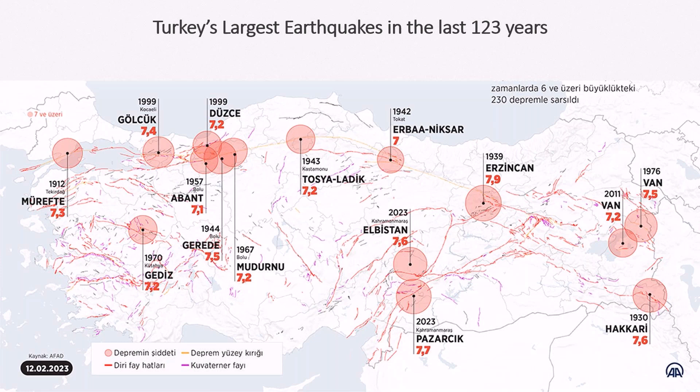The first earthquake had a moment magnitude of 7.7, with the hypocenter at a depth of 8.6 kilometers. Ten minutes later, another 6.6 earthquake happened—this was the first incident that caused the majority of devastation and collapses. Only after 9 hours, another 7.6 earthquake occurred in the northern part of Kahramanmaraş, in Elbistan, at a depth of 7 kilometers.

As of March 20, the death toll is 50,000 people, with 100,000 people injured. We experienced 17,000 aftershocks—minor, with maximum magnitude up to 6.7. 11 cities are affected, 20,000 buildings collapsed, and 10,000 search and rescue team members from 88 countries were deployed and sent to Turkey.

I want to talk about the regional tectonics a little bit. I'm sure you're all aware of this if you've done your research. The Anatolian microplate is moving west under the effects of the African, Arabian, and Eurasian plates. This movement exhibits itself in the form of two major strike-slip faults: the North Anatolian Fault and the East Anatolian Fault. These recent earthquakes happened near the Marash Triple Junction, where the Arabian, African, and Anatolian plates meet, and this junction is quite an active zone.

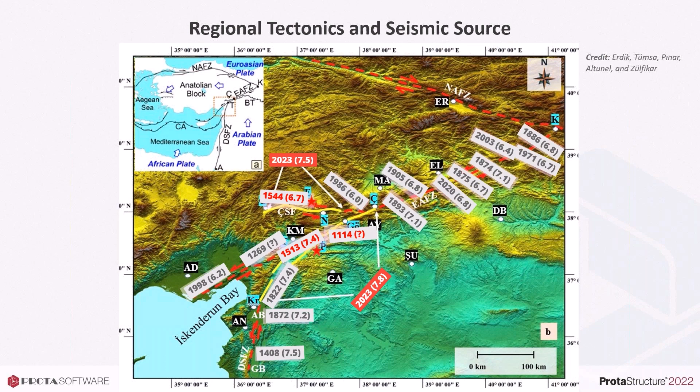Here you see the map of the East Anatolian Fault Zone. The major active fault segments are shown in dashed red lines, and the yellow dashed lines show reactivated segments during the February 6 events. The numbers in the rectangles show the year of the last major historical earthquake in that fault segment and its approximate magnitude. Based on historical data, the fault segments ruptured during this earthquake sequence were seismic gaps with tectonic stress accumulated for at least 500 years. I tried to show them in red fonts.

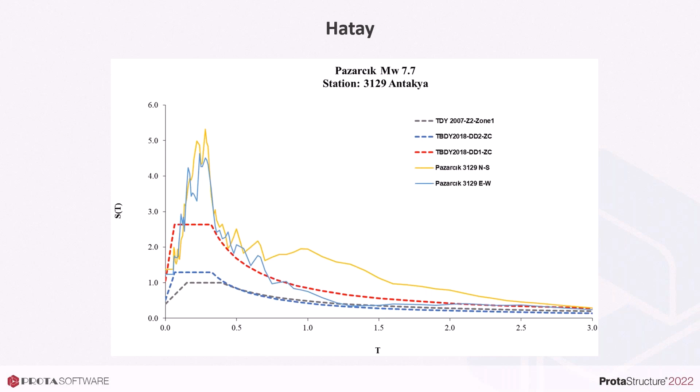The city mostly has 5 to 15-story residential buildings, which seem to be the most affected as seen in the spectral acceleration spectra. The spectral accelerations exceeded the design basis earthquake (DBE) in the code, but they seem to be below the maximum considered earthquake (MCE), which has a return period of 2,500 years, especially before 0.5 second periods.

The basin amplification effect is clearly seen after approximately 1 second, and even after 0.5 seconds for some stations. Since most of the buildings in Hatay have 5 to 15 stories, that means the majority of the buildings are affected.

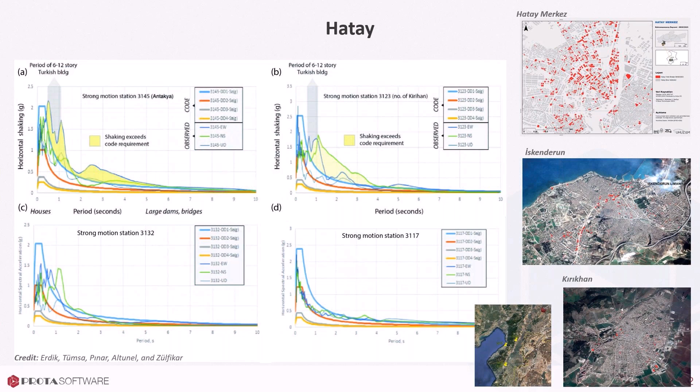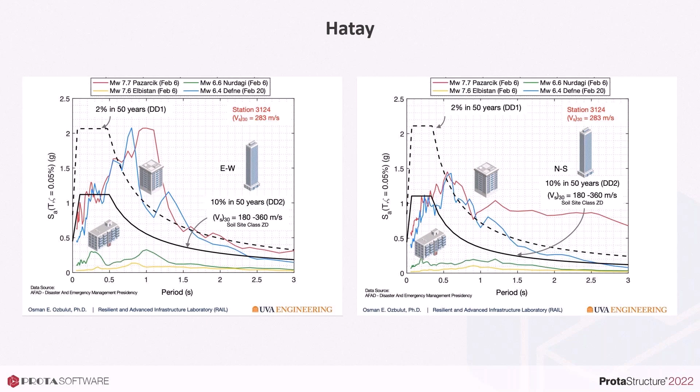It exhibits 5 to 6 times greater spectral accelerations than the code spectra between 0.1 and 0.5 seconds. This record is not currently on the government AFAD website; probably there is an error with the data and it will be restored once corrected. But this means that 2 to 6 story buildings near the station will be damaged.

For confirmation, the spectral accelerations in the Kahramanmaraş city center, stations 4620 and 4615, are also plotted. Acceleration values seem to fit with DBE and MCE code spectra, but still an amplification is observed after 0.5 seconds for station 4615.

This means buildings designed and constructed in accordance with the new Turkish earthquake code should perform well. Old or deficient buildings may suffer from spectral accelerations as high as 1.25 G.

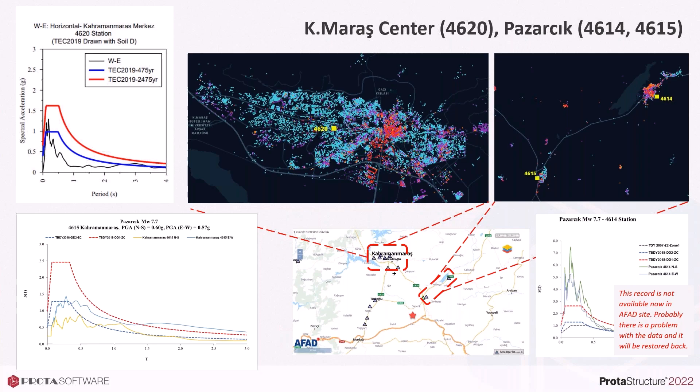A similar scenario is observed for Gaziantep. In the city center, the code spectra seem to estimate the spectral acceleration demand well, and the new buildings should not be suffering from collapse.

By new, I mean buildings designed and constructed maybe after 2007 and 2018, even after 2000, if they are supervised and constructed well.

But on the graph, we see spectral accelerations as high as 0.6 G for very old and deficient buildings, for 2 to 5 story buildings, in Gaziantep Merkez city center.

In Islahiye, one of the provinces of Gaziantep, 2 to 5 story buildings suffered from approximately 2G spectral acceleration. In Nurdağ, another province, amplification is also observed and high spectral accelerations are seen on the graph. The code values were exceeded, but MCE values still seem to estimate it well. The mostly affected buildings seem to have 2 to 12 story heights.

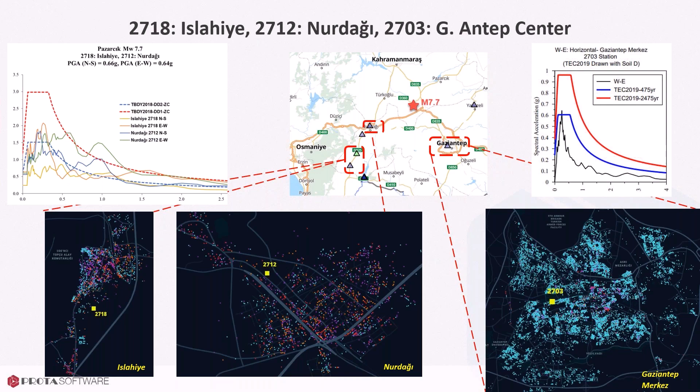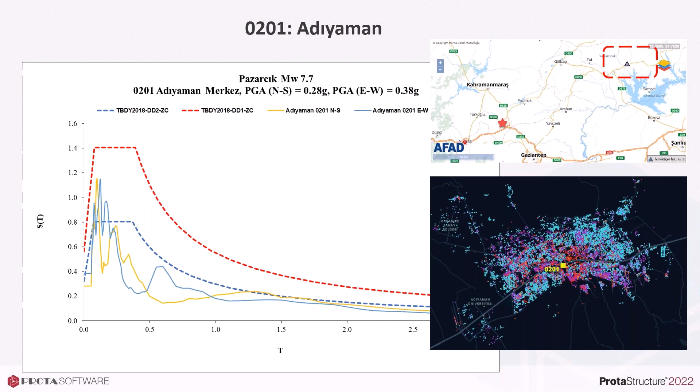For Adıyaman city center, buildings with 0.1 to 0.3 second periods seem to suffer a maximum of 1.2 G spectral accelerations. After 0.3 seconds, a quick drop is observed. Buildings complying with the relatively modern Turkish earthquake codes should perform well in this scenario, but older and deficient buildings will be adversely affected.

Osmaniye is another city that did not experience spectral accelerations higher than the code specified values. So 5 to 15 story deficient or old buildings will be affected from soil amplification. If you check the period values between 0.5 and 1.5 seconds, you can imply that 5 to 15-story buildings, roughly between 0.7 and 1.5 seconds, will be affected, but the values are still under the MCE.

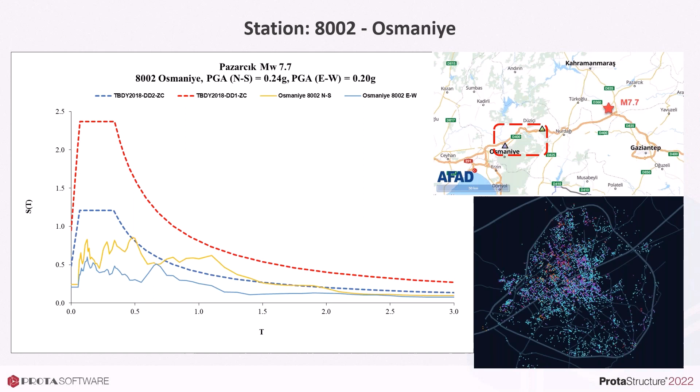As a result, we can maybe say that in some of the cities the spectral accelerations were really high, especially when we have the soil amplification effects in Hatay or other areas like Gaziantep, Nurdagi, or Islahiye. But we cannot say the same for all of the cities. The other cities seem to have relatively lower spectral acceleration values.

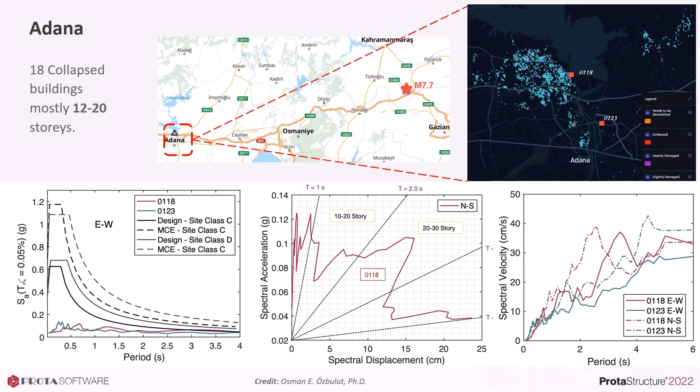So let's talk about the damages that we have seen on the site. One of the most commonly encountered failures or insufficiencies regarding material quality is the brittle failure of rebars. I'm not sure if you can notice it on the screen, but in reinforced concrete we don't really expect the reinforcement bars to fail like a brittle chalk.

These rebars are most likely untested, and they seem to be not meeting the production standards in terms of carbon content. So they are either brittly sheared or just ruptured. This is not the proper behavior that we expect from a rebar.

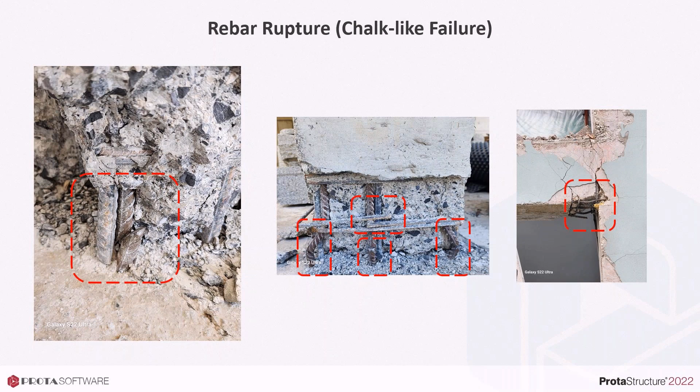Another frequent cause was insufficient lateral stiffness. The majority of the buildings that we have seen have insufficient lateral stiffness, which results in, if not collapse, a high level of damage in structural and non-structural members.

Unfortunately, it's not a common practice in Turkey to use shear walls in buildings. If used, the ratio of the shear walls to total area is usually not sufficient. So we cannot say that all of the buildings are frame buildings — we also have shear wall frame buildings in our country, but when you check the ratio of the shear walls, usually they are under a certain ratio.

And of course, the wall dimensions in mostly residential buildings are used at the minimum sizes required by the code. Also, one of the reasons for that is the architectural design, which does not allow the use of shear walls, especially at the building perimeters. And this is combined with poor construction and poor supervision.

When you build a frame structure in such a country — not only Turkey, but any country with poor supervision and construction practice — the frame systems cannot withstand earthquake forces without damage or collapse, because frame systems, as you're well aware, need to be detailed very diligently in order to sustain ductile behavior.

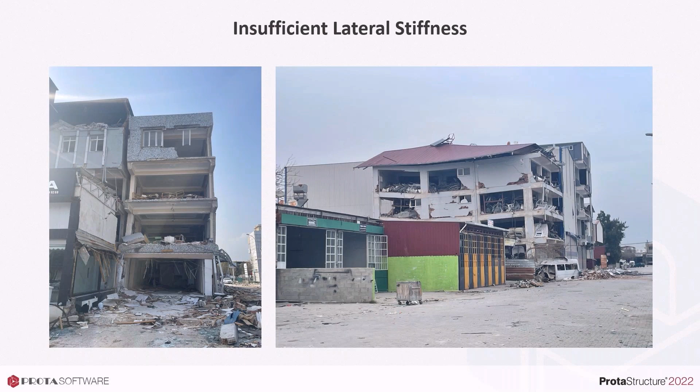So these are two examples of a bad habit in structural system formation. First, due to permit reasons, and in order to enlarge the floor plan area — the commercial area at the upper floors — heavy cantilever portions are used in the structural system.

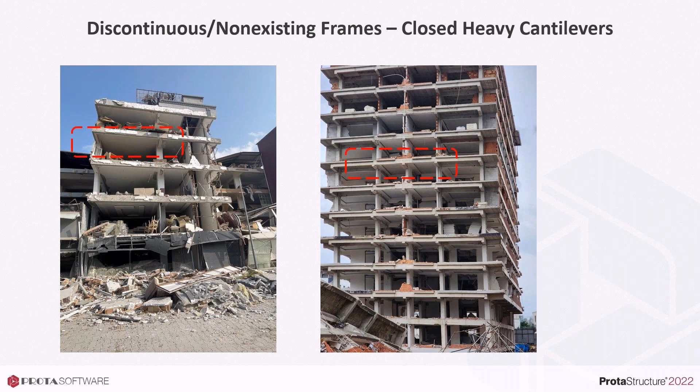And since architects prefer a flat ceiling, this results in discontinuous frames, as you can see in the pictures. Because the frames are discontinuous, the building's lateral stiffness is reduced because of that. So this is a typical floor plan that can be encountered in practice.

The only shear walls are utilized in elevator shafts, and they are asymmetrically positioned at the edge of the building. And the building floor area is enlarged at the upper floors using cantilevers, which again results in discontinuous frames. You can see the beams missing on axis A, which creates an additional lack of lateral stiffness.

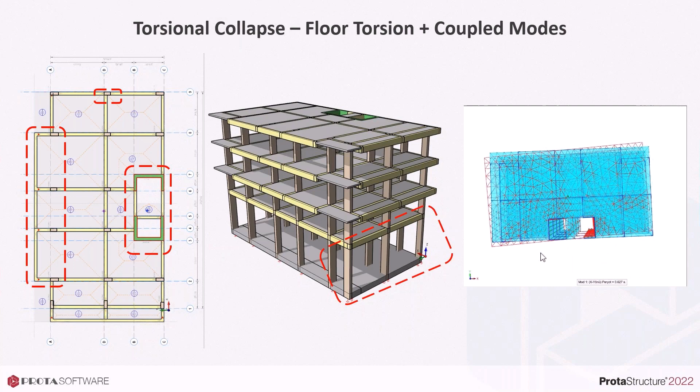So if you look at the displaced shape — the mathematical model of the building — it's clearly evident that this building has the first mode of torsion. That's the example on the side. Torsional irregularity and mode coupling is a very important factor for triggering collapse.

In this building, a rotational collapse is observed. It's also combined with a soft story, as can be seen in the ground story columns. Most probably the ground story was a commercial area with larger story height and without any masonry walls or shear walls.

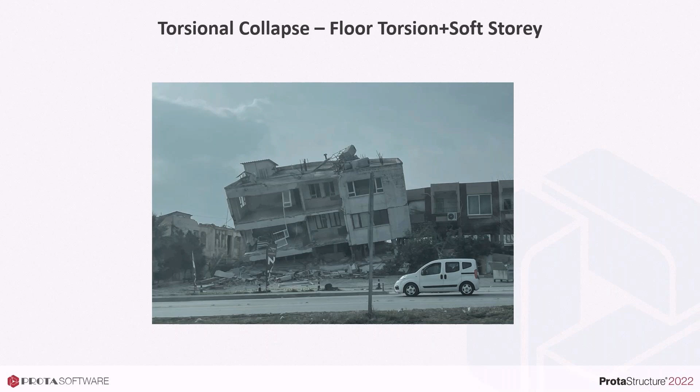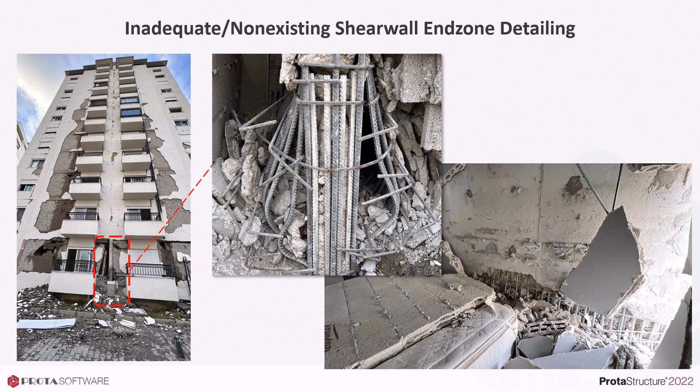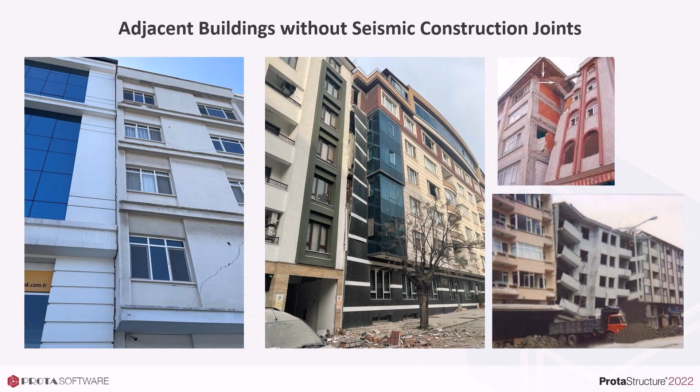Adjacent buildings are also very common practice in Turkey. Insufficient construction joints and mismatching story levels are primary causes of pounding damage.

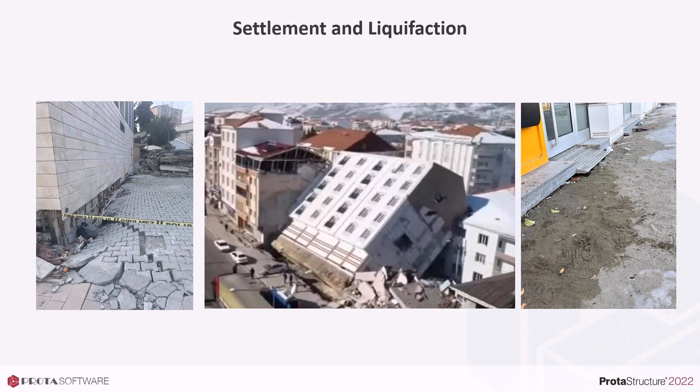We have also observed settlement and liquefaction issues. The reason is, of course, construction on cohesionless alluvial deposits with high water table, without any ground improvements such as jet grouting, etc. Incidents of sand boiling are also observed, especially in the Iskenderun region.

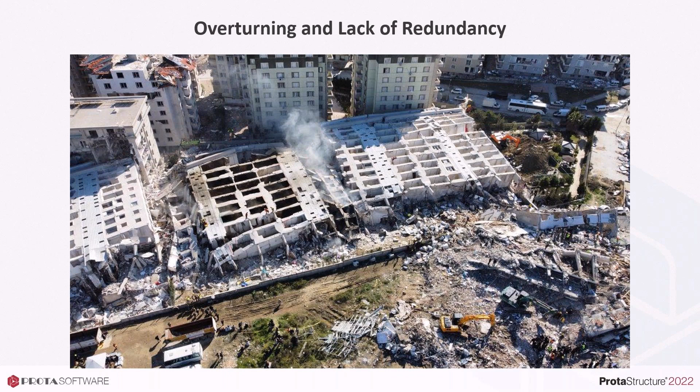Turkey has a large old building stock. Most of our buildings are older than the year 2000. It was after the 1939 Erzincan earthquake that seismic effects started to be considered in building design in Turkey. The 1975 earthquake code had provisions for seismic resistant design. In 1998, we had a relatively modern earthquake code, quite like UBC. It had capacity design principles to control failure mechanisms and brittle failures in the members and joints.

Then the 1999 Gölcük and Düzce earthquakes happened. These were also devastating events with 7.4 magnitude. In 2007, we had a new seismic code. The calculation of seismic hazard was the same as the older code, which divided the country into 4 seismic zones. But it was the first time the codes had a dedicated section for retrofit and assessment of buildings, in 2007.

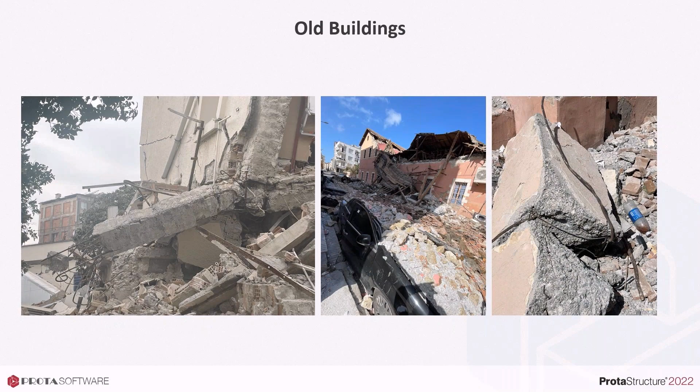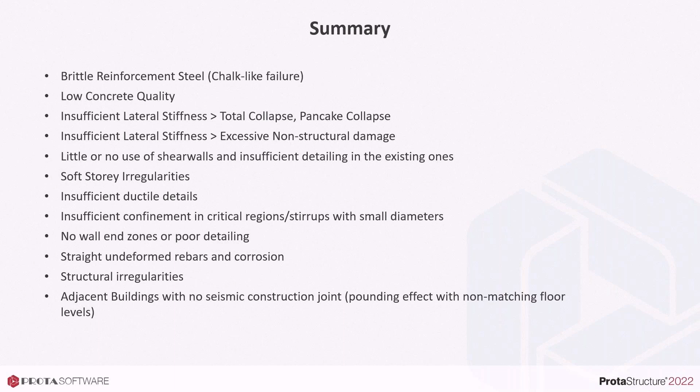But we also have standing buildings. The buildings we have seen with a sufficient amount of shear walls, or shear walls placed in proper locations, prevented collapse and reduced lateral displacement. Buildings with well-established structural systems still stood, frame buildings with substantial column sizes like 80 by 80, and they seem to have had good supervision. Retrofitted buildings, like one of the bank buildings or the block I'll tell you about, also seem to be standing.

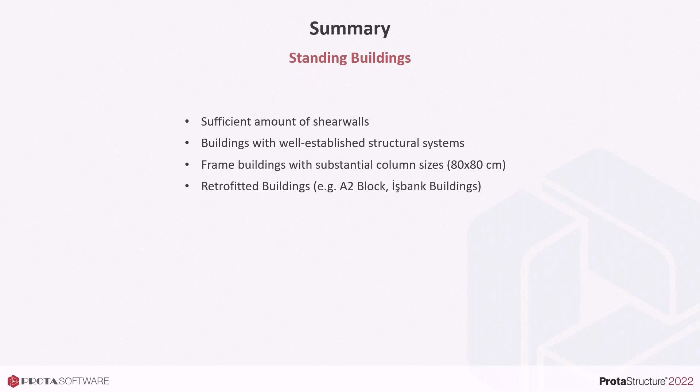So what's next? These are my personal opinions, of course. We need to have professional engineering in Turkey, and our engineers - and I think all engineers in the world - should have the knowledge and the feeling of structural system behavior. We need to have the ability to interpret and check computer outputs. Unfortunately, that's not the case in Turkey.

Because of the complexity in the codes and the methodologies in the codes, doing a hand calculation is not possible. We have to use computers, that's a fact, but we have to understand the methodology and be able to check it. The more complicated the code methodologies get, the more difficult it gets to check the building or understand what's going on. Maybe in Turkey we should switch to a Chile model with compulsory shear wall usage.

And for the existing building stock, we need effective and easy to apply retrofit techniques with safe and relatively easy assessment methods. So these were my two cents about the earthquake in Turkey. Of course, specialists should comment on it better and further, and obviously further studies should be conducted on this earthquake, because these were maybe the biggest earthquakes in the history of Turkey.

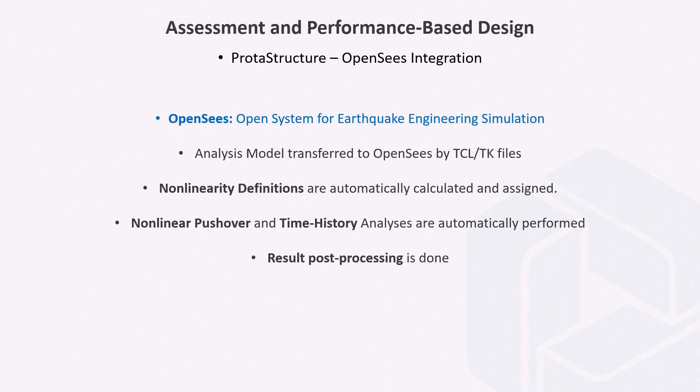ProtaStructure's analytical model is communicated to OpenSees via TCL files. In addition to the detailed analytical model, nonlinear material properties are automatically calculated and added on top of this geometrical model. The entire structure is then ready for performance analysis. For a successful OpenSees integration, considerable pre-processing and post-processing is necessary - all the material nonlinearities have to be generated and sent to OpenSees.

Column, beam, and wall sections can be modeled with fiber elements and analyzed with numerical techniques to derive moment curvature relationships in ProtaStructure - that's what we do. We are using confined and unconfined concrete regions, and strain hardening in steel can be taken into consideration. For more accurate analysis, you can even create the fiber mesh around the rebars.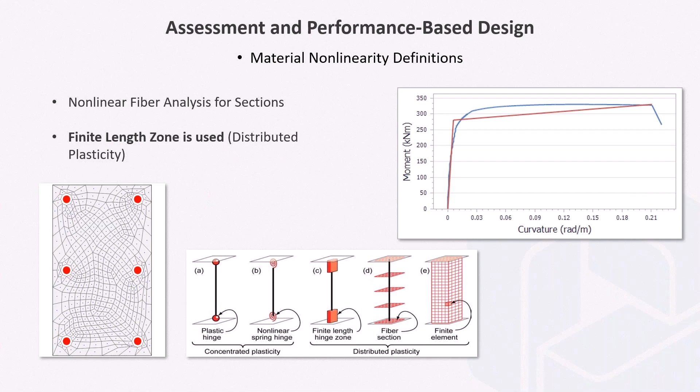The single mode static pushover analysis is performed again using ProtaStructure OpenSees integration with the plasticity models I have described. Parameters such as number of steps and target displacements can be controlled by the user. After the analysis, we obtain the capacity curve, which describes the capacity of the building, as the name implies, and is independent of the earthquake demand.

So what we do is allow you to select a node that you want to monitor. You can monitor any node on the system and create the capacity curve for that node, and so we can extract the results at a certain demand point.

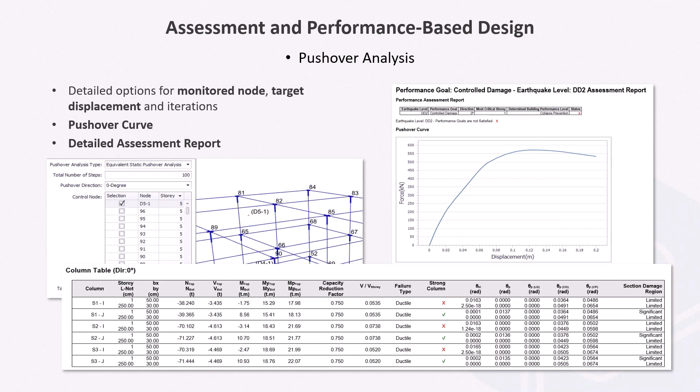After finding the demands, we create a performance assessment report. A vital step after obtaining the capacity curve is to find the demand that a target code spectrum requires, also known as the performance point. The target displacement identifies the performance point. After plotting the capacity curve, ProtaStructure can detect the target displacements according to FEMA 356, Eurocodes, and Turkish codes.

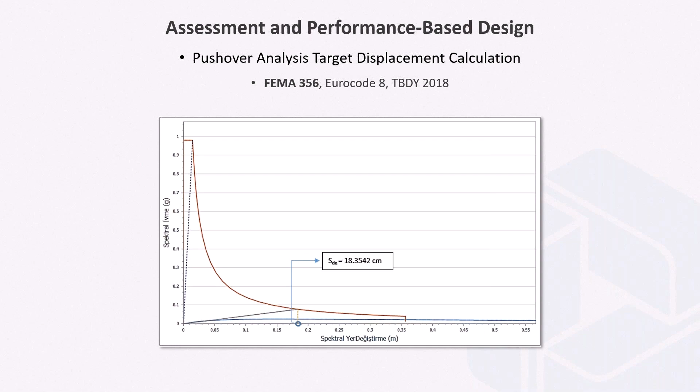Then we extract the values from that demand step and create an assessment report with the axial loads, shear forces, moments, and plastic rotations obtained at that certain point.

A nonlinear time history analysis is different. The pushover analysis in ProtaStructure is a single mode static pushover analysis, meaning as the load pattern we use the mode shape, the first dominant mode shape, as a load pattern. Of course, pushover analysis is a nonlinear analysis, and it can consider the hinge mechanism and redistribution between members, but since it depends on the first mode, it's not valid for all buildings.

Particularly if you have higher buildings, or buildings with coupled modes, or mass contributions less than 70%, or torsional irregularities, even static pushover may not be applicable for the building. In that case, you have to revert to a nonlinear time history analysis, which is also possible in ProtaStructure with OpenSees integration.

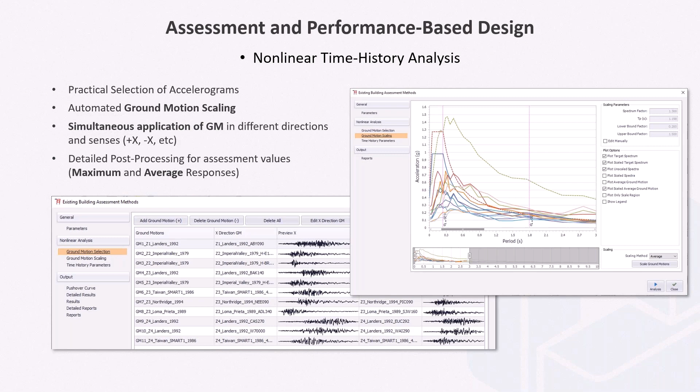After that, we post-process the results for maximum and average responses. Remember that we cannot use only one set of ground motions; we have to use maybe 11 ground motions. So extracting maximum negative and maximum positive responses from these data sets for each time step, and preparing and harvesting them for a proper assessment report, is quite time consuming. ProtaStructure can do it for you.

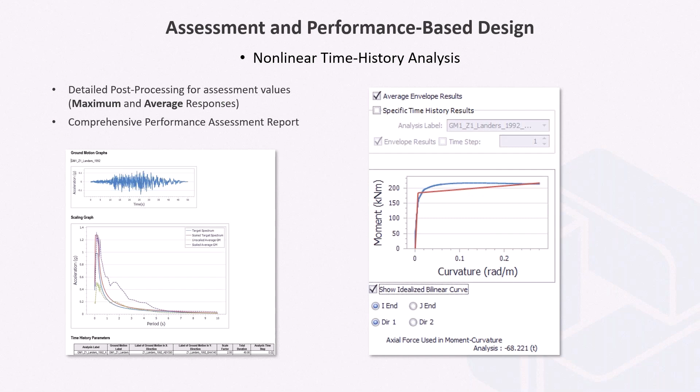Here you see some of the examples, some of the screens that you can see in ProtaStructure. Also, at the end of the building assessment, to visualize the assessment results, you can color code the member damage regions in the 3D model.

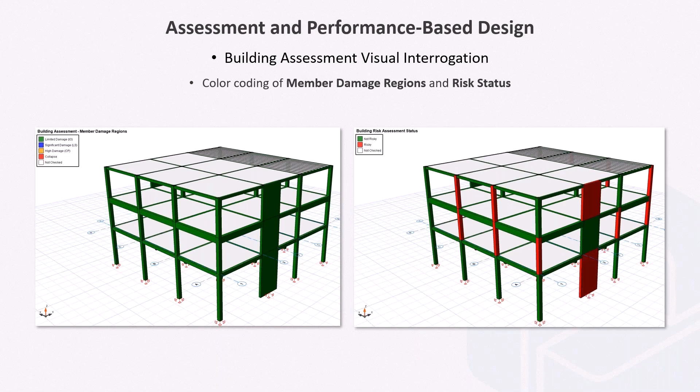To mention a little bit about retrofit techniques: first of all, retrofitting existing buildings may not be feasible for all buildings. If the cost of the retrofit exceeds 35–40% of demolition and rebuilding the structure, it will lose feasibility. But if the building is very valuable and you cannot just give up on it, retrofit can be a viable solution.

One of the most utilized retrofitting strategies is to use reinforced concrete walls inside the existing frames, or you can just use eccentric shear walls attached to the exterior of the building, as I will explain in my case study.

This method improves the overall lateral behavior of the existing building, but you have to apply it from the foundation to the top of the building. This is called a system retrofit. It doesn't focus on individual members; rather, you focus on improving the condition of the building, especially the lateral stiffness.

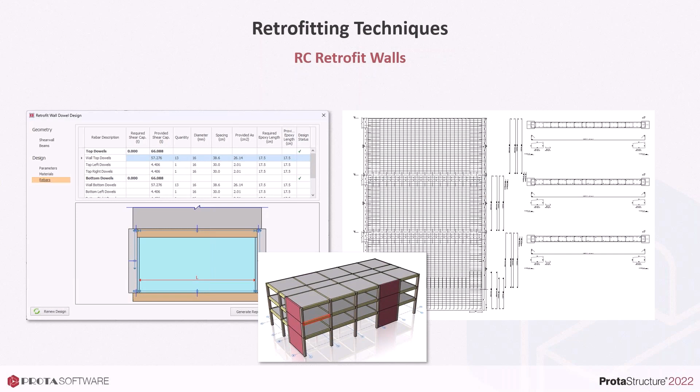Another common approach is to apply reinforced concrete column jackets, but jacketing can be considered a member retrofit rather than a system improvement—it focuses on individual members. So the first reflex of the engineer should be to improve the lateral system rather than focusing on individual members. An RC column jacket can improve the axial load and moment capacity of the existing column, but you can only improve the moment capacity if you extend the longitudinal bars into the upper story.

That means you have to drill the slab and extend the bars to the upper story. This is an option in ProtaStructure as well. If the existing column is too damaged or weak, you can also delete the existing column from the model, so you don't get any results from it in the assessment report. That may usually be the case because when you insert a jacket, you also apply dowels to the existing column, so the jacket and the existing column start behaving in the same way—they become integrated together. So maybe it should be considered that way.

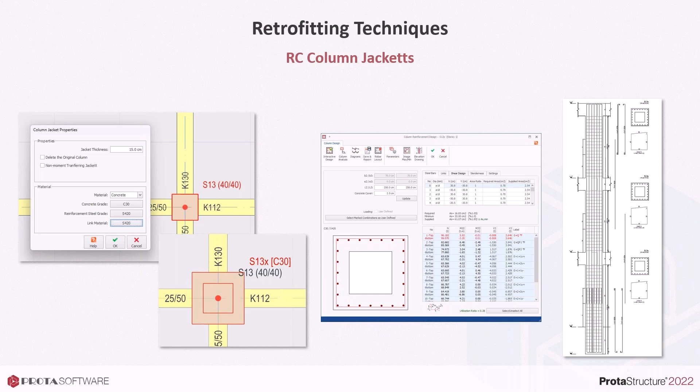Another popular retrofitting technique is wrapping the columns and beams with CFRPs. But it's again similar to jacketing—it's a member retrofit rather than a system retrofit. In ProtaStructure, you can insert this retrofitting scheme to the members. For columns, it increases the shear capacity and axial capacity because it provides additional confinement to the column, and for beams, it increases the shear capacity. ProtaStructure allows you to consider these effects.

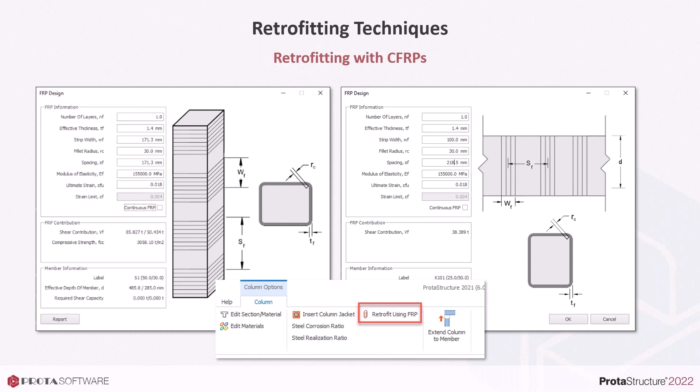Another retrofitting technique that can be considered is base isolation, but we usually don't use it as a means of retrofit in most buildings, because if the building is too weak or the lateral system is too deficient, it may not be feasible or practical to install these isolators. So to use base isolation, the building should have a high economical value—it should be approached with caution. But you can use base isolation as a retrofit technique.

In fact, we applied this to one of the hospital complexes in Istanbul using ProtaStructure. All the existing columns were cut and isolators were installed. This was a relatively robust building, built in 1999. And the building to the right, the curved one shaped like a boomerang, is a new building that's built with isolators.

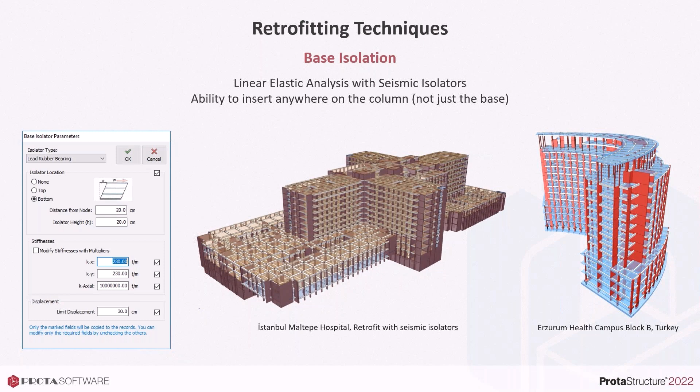This is an example section from the seismically isolated hospital. The yellow ones you see are the isolator units applied at the top of the columns in the basement, and the red ones are just like sliders, roller supports, which have very little lateral stiffness.

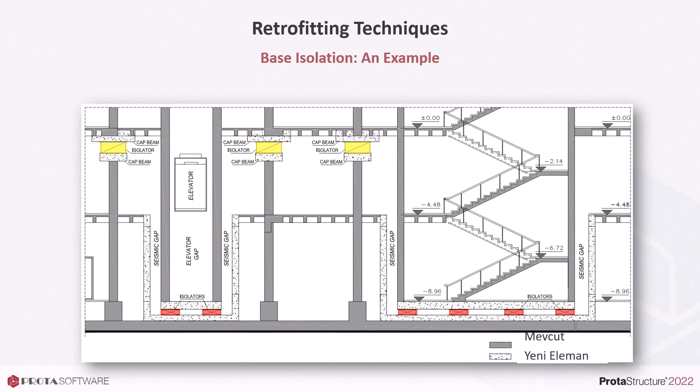As I've said, you can model seismic isolators in ProtaStructure—this is a screen capture from a ProtaStructure analysis model. But I want to emphasize that you have to decide the isolator type and isolator layout before modeling them in ProtaStructure, since ProtaStructure cannot perform a nonlinear analysis with the isolators. After selecting the isolator types and introducing their equivalent stiffness values in the model, you can perform a linear elastic analysis in ProtaStructure.

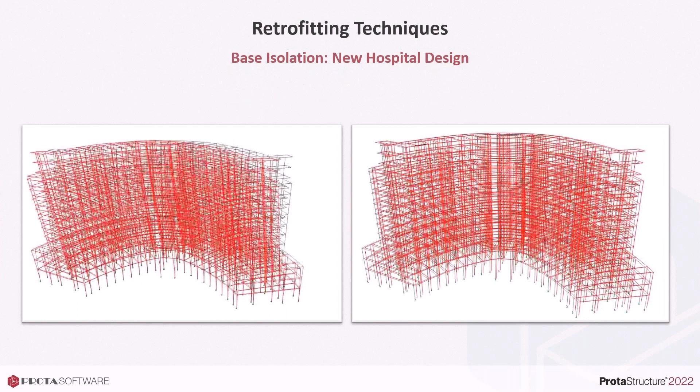So these were all the things I wanted to say about retrofit techniques and assessment techniques. Of course, this is a very detailed topic, so I can only give you an overview of ProtaStructure's capabilities and an overview of the analysis methods themselves.

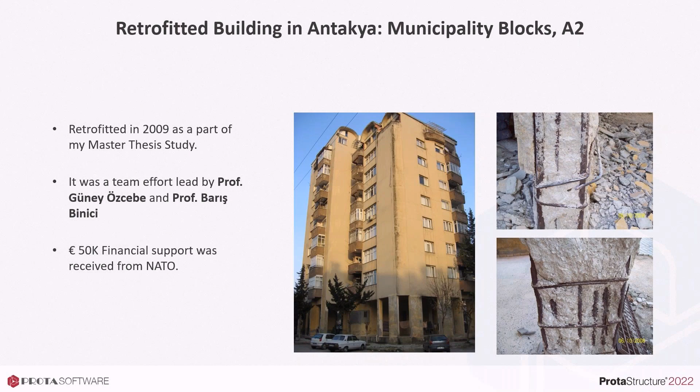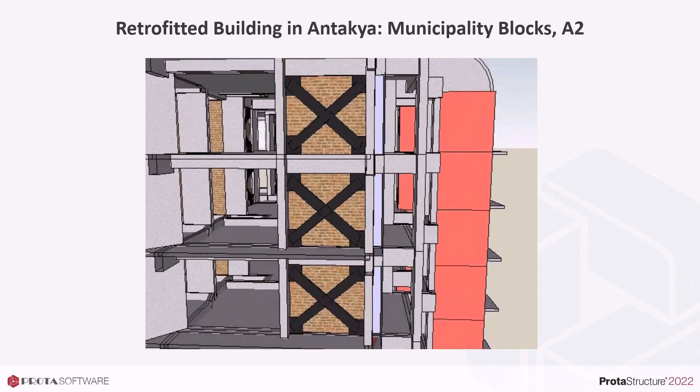So here's what we did in the building. On the screen, the red things you see are the shear walls. We applied shear walls on the exterior of the building, and in the middle we selected some of the infill walls and applied FRP strips. We applied them as compression and tension ties, and anchored the FRPs to the existing frame joints, as well as surface anchors that bind it to the other side of the infill wall.

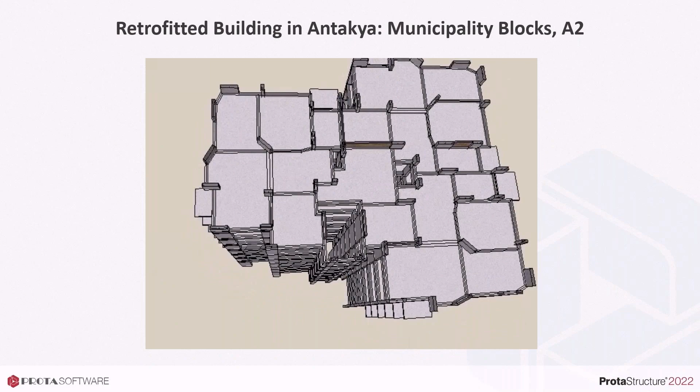So we wanted to provide as much lateral stiffness as possible to the building by applying reinforced concrete walls and CFRP retrofitting. The walls themselves were not enough to satisfy the Turkish Earthquake Code 2007 life safety conditions, so that's why we also put in the CFRP infills.

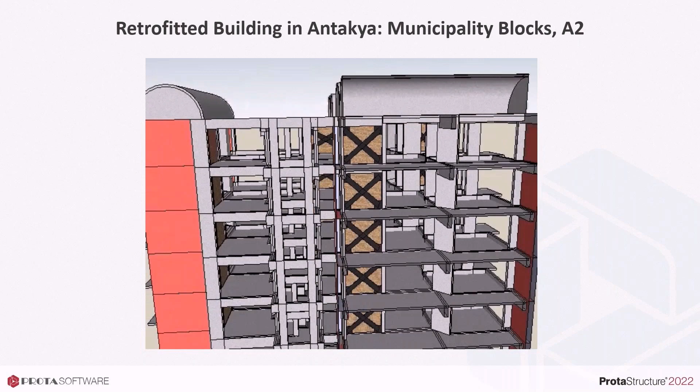So the eccentric shear walls were built outside the building, but pay attention that we anchored them to the surface of the members, and we anchored them to the slab level where most of the inertial forces are transferred. So they are anchored to the system.

And also we had corrosion repairs. So what we did, we just cleaned all the concrete cover, cleaned up the corrosion, applied chemicals, and wrapped the column with FRP to further reinforce it.

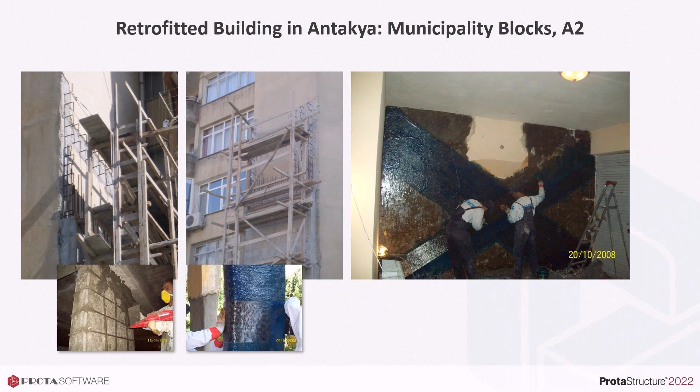There were three blocks: a first block, second block, and third block. We retrofitted the second block. The third one, unfortunately, immediately collapsed during the event. The first one is heavily damaged, but the only retrofit it had seen was FRP rewrapping around the columns in the ground story and the infill walls, again only in the ground story.

But the second block that we retrofitted did not suffer any heavy damage. We can say it satisfied the life safety performance level, while the slightly retrofitted first block only satisfied the collapse prevention level. So this was the very brief story of the building that I retrofitted as part of my master's study.